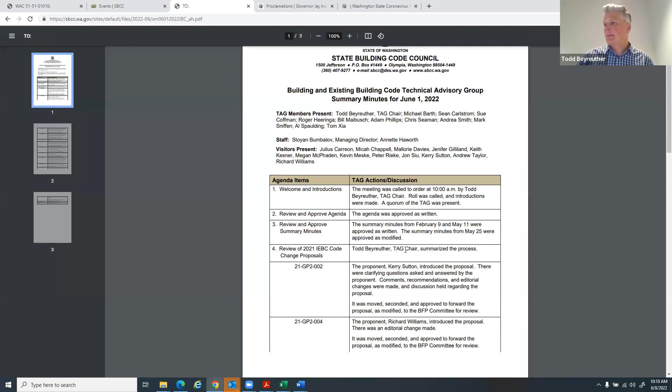Are you interested in flashing those? Annette, are you showing the minutes? I don't see them yet. Give me a second then. Well, if they're posted, I guess we can give a second for everyone to make sure they've reviewed them. Sorry, that took me a minute. Can you see now? No, thank you, Annette. Well, I'm not sure who is showing the minutes, but it doesn't matter. It's summary minutes.

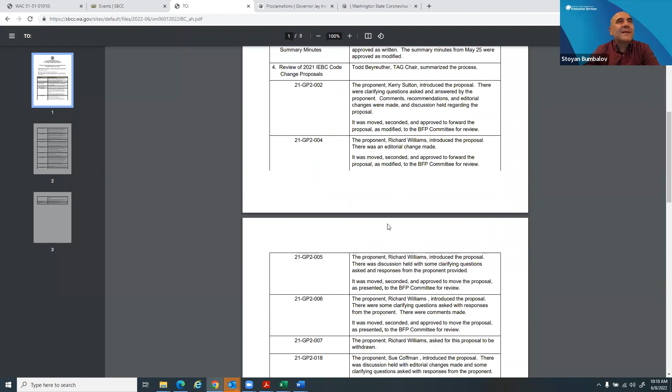Okay, as we're reviewing them independently, are there any proposed edits or changes? Let me know if I'm rushing anyone. If not, we'll hear a motion to approve. I'll move to approve the meeting minutes for June 1st. Thank you, Sue. Second. Thank you. Who was that? Sorry, I missed that. It was Andrew. Oh, Andrew, thank you. Okay, any discussion?

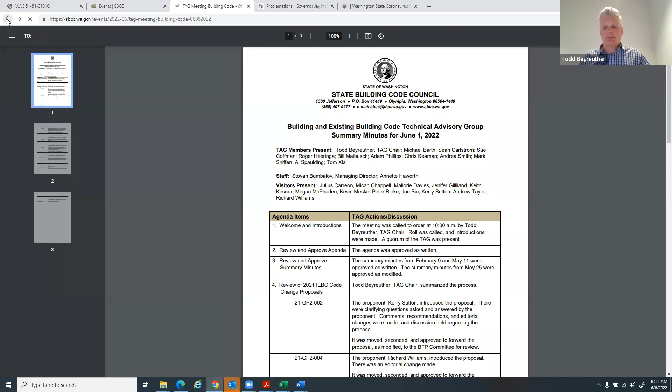All those in favor signify by saying aye. Aye. Any opposed, nay? Or abstentions? Okay, June 1st minutes are approved. Okay, now we're into the main item here, agenda item 4. I'm going to give a little bit of summary here as we work our way into these today.

So we are at the end of our initial phase as a technical advisory group, where we've reviewed proposals for the 2021 amendments to the Washington State Building Code for both the IBC and the IEBC. There are 3 proposals that we've tabled for this meeting. The IEBC was just the last proposal, and we chose to table it because it needed a little more attention, and at least one member wanted to take time to review. And then the 2 IBC proposals have been a more thorough discussion, and they've been a heavier lift. So we've left those 2 to this meeting.

I want to again restate for everyone that the Technical Advisory Group advises the State Building Code Council. The State Building Code Council are appointed members, often volunteers, appointed by the governor, with rulemaking authority granted by the legislature to conduct this process. The Technical Advisory Group, while we do take action, and although a couple of us are on the State Building Code Council, this is our recommendation on what the council should consider as it moves first into the standing committee, in this case the building, fire, plumbing, the BFP committee, and then ultimately the council. So there are 3 steps, and you see on the spreadsheet here, we're at the TAG recommendation.

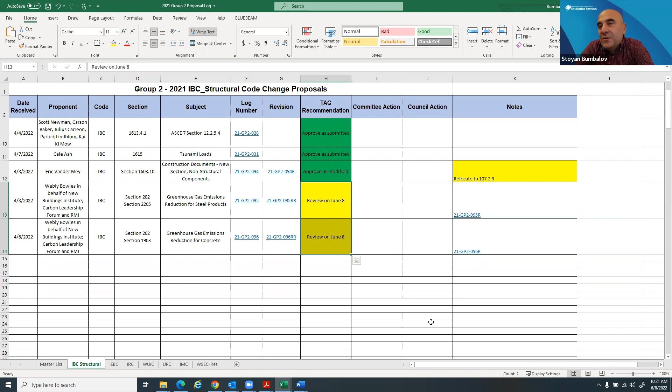And thank you, Stoyan. And Michael, to that point, in this position and responsibility as chair, I'm not taking a position on that. I've been advised to move forward and conduct the responsibilities of this role on these proposals. Roger, would you like to add to that, please? Yeah, I just want to respond. I believe that whether or not the original proposals 95 and 96 went against the RCW is an opinion, which I don't happen to share. However, this TAG is not the venue for us to get into conversation about interpreting the RCW.

The TAG is here to consider whether the proposal makes sense moving forward. That's number one. And number two, I would suggest, if people have not looked, the revised proposals in there have eliminated, in my opinion, any concerns that they would go against the RCW. So the second revision to these proposals, in my opinion, has taken out all of the controversial portions, and we need to debate that and talk about that as we get into those proposals later on.

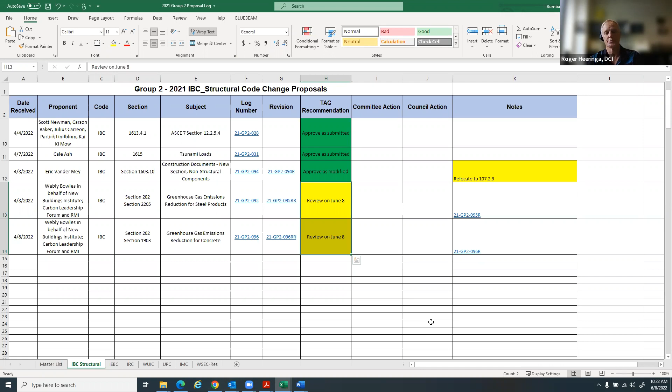Okay, thank you, Roger. Yeah.

Okay, so let's come back to these two proposals on the IBC, and we can have further discussions about scope and what our responsibilities are today as a TAG. As we discussed in the last meeting, I want to go through the final IEBC proposal first, and then we'll get to the IBC. So could we pull that up, please, and invite the proponent to speak to this proposal.

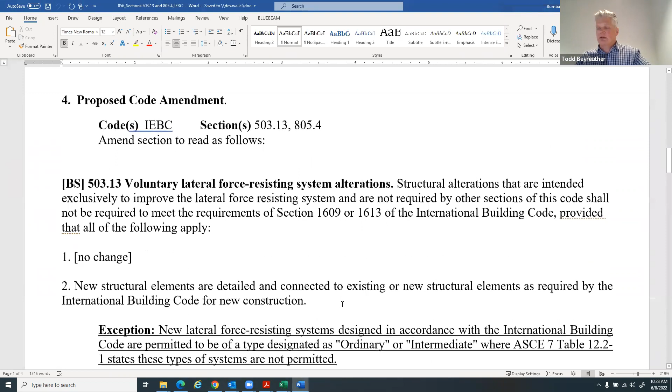Yeah, hi, this is Natalie Bohold, the proponent. Welcome. Thank you. Yeah, this is my first time joining this type of group, so thanks for letting me present this proposal.

So this proposal adds an exception to two sections in the IEBC: 503.13, which is a prescriptive method, and 805.4, which is the work area method. The purpose of this proposal is to add flexibility to the type of lateral systems that can be used for a voluntary seismic upgrade or alteration project. The reason this proposal was introduced is that the current language can be found to be ambiguous and doesn't clearly offer flexibility in the type of lateral systems that can be used for voluntary seismic upgrades.

Currently, the main text of these sections states that the seismic and wind sections of the IBC do not need to be met as long as 4 items are met, which are not currently listed here, but they're listed in the code. Of those 4 items, the second one states that where new structural elements are added, these shall be detailed and connected as required per the IBC for new construction.

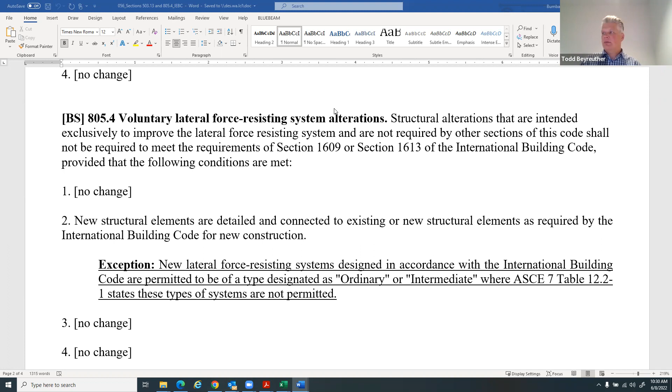Are there any questions from anybody else? Okay, I'm not seeing any, but having cut my teeth on URM retrofits during the Nisqually era, I also am in strong support of this. Thank you for bringing this forward. And this is specifically for IBC designs. Somebody using ASCE 41 obviously has more flexibility in the design. So, yeah. Okay.

Well, seeing no other questions or comments, would someone like to make a motion to move this forward to the BFP committee? Yeah, I would make a motion that we approve this as submitted. Thank you, Roger. This is Sue. I'll second. Thank you, Sue. Any other deliberation? Okay. All those in favor signify by saying aye. Aye. Aye. Aye. Any opposed, nay? Or abstentions? Okay. So approved. Thank you, Natalie.

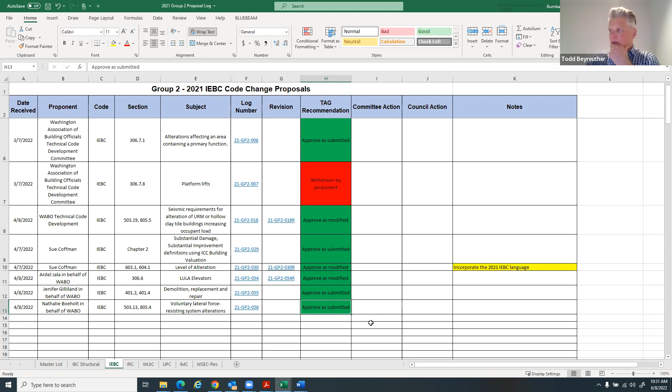Thank you. Okay, now that should conclude all of our IEBC proposals. Now we'll move into the two IBC that we previously discussed. And I see, as it was posted, that there is an amendment. So I think I'll first ask the proponent to give us a summary, please.

All right. Good morning. My name is Webly Bowles. I'm with New Buildings Institute. Thank you to the TAG for your time in considering these proposals. It's been a heavy lift for you, I hear that, but I appreciate your time and attention and the AG's time in reviewing these proposals.

So there's 3 proposals here. The TAG can choose to accept the third proposal or not. The code change proposals 95 and 96 have been combined into one proposal of 95 with the addition of engineered wood. And that's a little bit of a backdoor, and the TAG can choose if they want to do that or not. We did that because of the overwhelming interest in including engineered wood into the proposal.

If I can clarify first, yes, it was submitted. I posted it on the website. However, I consider this a proposal that was submitted after the closing date on April 8. The TAG can discuss this and recommend the council accept this proposal, and I'll make the same comment at the council. And if the council decides to do it, it's out of my hands.

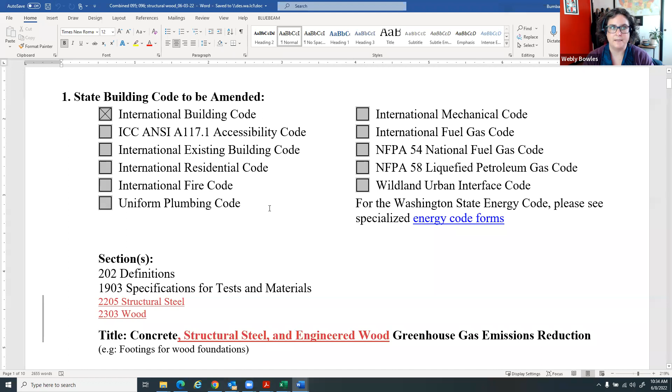So here is the combined document. Again, I will use this for discussion purposes, but whatever the TAG recommendation is, I will update 95 and 96. Okay. On the website, you have the last versions of 95 and 96, and again, I posted the combined document. All right. I see another hand up. Should I move forward with doing the quick summary? Yeah, the floor is yours, brother.

Thank you. Okay. So in the concrete portion first, it requires that 75% of the ready mix concrete mixes provide product specific Type 3 EPDs, environmental product declarations, and that they are available in a public database. 2 definitions have been removed, cementitious material and lightweight concrete, and that just means that the ACI's definitions apply over these revised code definitions.

We've also separated out in the definitions CO2 and GWP, though I'm not sure if we actually need to include GWP because it's not mentioned within the proposal. We've also clarified that the proposal is for the primary structural frame, including lateral and foundations.

I'm not sure that we actually need to state lateral, but because it's not clear that that definition is within the primary structural frame. So that excludes parking lot, sidewalks, and other concrete from this proposal. Just clarifies that a little bit more. And then we have the same exceptions for precast, shotcrete, and auger cast. And that just helps to clarify that we're really looking at ready mix concrete here.

It only applies to projects that are over 50,000 square feet and that use more than 50 total cubic yards. So projects where no concrete providers have EPDs within 100 miles are also excluded from this. And then we have confirmation of the product's EPDs should be provided to the AHJ prior to certificate of occupancy, either through a signed letter by the architect engineer. And I'm happy to talk more about implementation and enforcement later. Just want to get through these changes first.

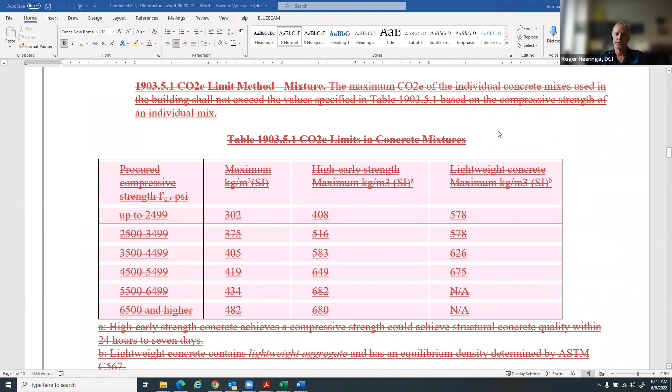I know that there were concerns about smaller concrete producers or smaller suppliers, and I think, number one, limiting this to primary structure takes out all of the sidewalks, curbs, all of that kind of stuff. So it does just address the primary structure. I think the 50,000 square foot limit means it is only for larger projects. While this could mean that there are projects that a small supplier goes after where they do have to have EPDs, it's not like they're going to have EPDs for every mix that they have under this proposal.

There was a concern about ramping up of needing to have these EPDs, and I want to be clear, theoretically, if it goes all the way through, it would become effective July of '23. These EPDs would not need to be submitted and completed until right before C of O of a project that is approved under the new code. So I would say 6 to 12 months of a design and permitting process and another 12 months of construction, you are probably in the January of 2025 range when you would actually have to have these EPDs available. So I don't think that this is springing some huge issue on the industry.

And then, as I said, there were comments about why we're doing steel and concrete, not wood. Ultimately, in my opinion, concrete and steel are the products that are responsible for the largest percentage of greenhouse gas emissions. So I would support 95 and 96 under their currently modified form. I would also support the combined version that includes wood as well, assuming that works from a process perspective. So that's all I've got.

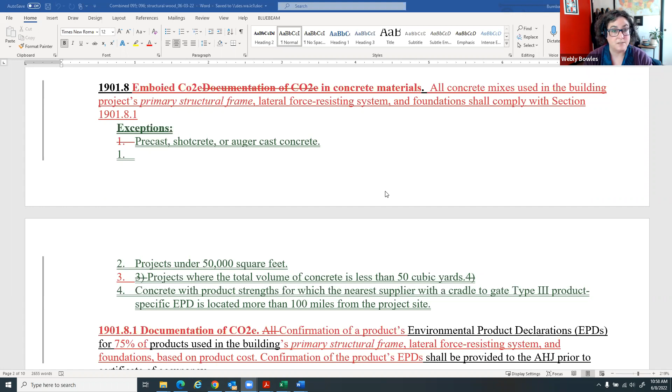You mentioned concrete product in one section. The product should be defined wherever it's first mentioned. If we need to clarify that, I think we can. The exception for steel based on cost is, I understand the concern here.

I think that this, we tried to come up with a similar aspect for that 50 cubic yards of concrete, so that it's somewhere in the same realm of, if you're not using very much of this product, it doesn't need to comply.

I think from a plans reviewer standpoint, you generally understand how much steel is in a project based on the total project cost that is associated on the plan at plan check. When you get into construction, obviously all the cost change things happen, but I think that you need to go back to that stage if we're talking about kind of how to implement this. I think we can only really do the plan that's set up at permit. So that's where I would say that the design team's generally going to know if the steel is about 5% of the total project value.

And then in terms of the code reviewer tracking this, I think it was said before that it's really a design phase aspect that needs to be tracked and verified, and the confirmation comes from the design team, either from a letter. So I think we had changed the language a little bit to say confirmation of the product's EPDs shall be provided to the AHJ prior to certificate of occupancy. And that confirmation doesn't mean it has to be the product's EPDs. We could have a letter that's signed by the architect or an engineer. It could be a letter in a table of products, a top sheet, however you want to see it.

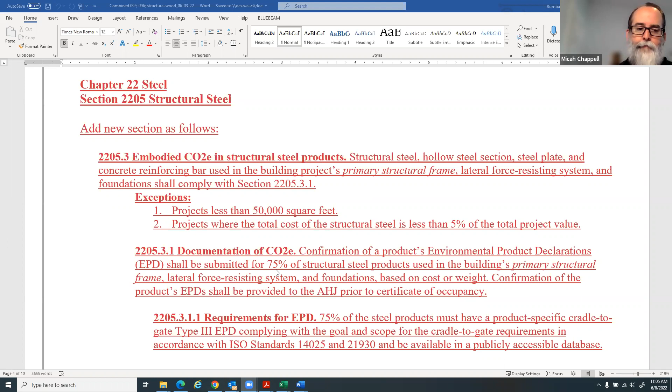Thank you, Micah and Webly. Okay, Rachel, please. Good morning.

I am Rachel Jamison, Vice President of Markets and Sustainability with the American Wood Council. We represent 86% by volume of wood products made in the United States. I'm grateful for the opportunity to speak with you today. I want to strongly oppose this proposal brought forward to you by the Carbon Leadership Forum and the New Buildings Institute. We first want to recognize that there is indeed an urgent need to act on climate change.

The American Wood Council has been acting with urgency on data collection and other initiatives. Decarbonizing the built environment is necessarily going to be a part of how we address the challenge of climate change. Some questions have been raised about the new section on wood in this combined version and how industry was engaged in this addition. I can put it simply, we were not. In fact, the language comes from a House bill that didn't make it out of committee 2 years in a row, and wherein we have been working in what we thought was good faith with the proponents on language that was workable.

As has been articulated by several other speakers, the building code is not the right place to regulate carbon. This language in front of you has been tried and has not moved forward. It's been put in front of the Washington State Legislature 2 years in a row, and both years it's not made it out of committee. State senators, after last session, have articulated an intent to work with industry and NGOs in the interim on a policy that is collaborative, science and data-based, and that represents the best thinking of all impacted parties. The American Wood Council has been eagerly awaiting this opportunity. For the language to emerge in this context is not in good faith regarding processes that have already been discussed.

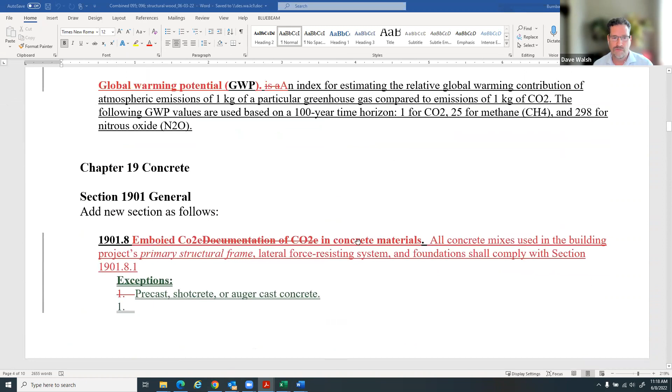First, does the definition of primary structural frame include the floor assembly and not just the foundation, columns, and beams which hold up that floor assembly? For example, does it include post-tension concrete floor slabs, a CLT floor panel, or a composite concrete steel deck and topping slab? If so, this needs to be clarified, and steel decking should be added as one of the covered materials. I did have a question about the timing between when this code language is potentially approved and the first date this will be enforced.

I think Roger commented that the first time that things would need to be submitted was approximately January 2025. I'll note that even though that may be the time that it would be submitted, the general contractor would have to have confidence at the time of bidding that the EPDs are available and ready to submit. So actually the window of action, I think, for a contractor is having those EPDs at bid time. While some manufacturers are ready to go today, others will need a year's worth of data collection to even begin to have EPDs. We need to give an ample runway for smaller manufacturers to get up to speed, which will result in more options and cost competitiveness at bid time.

And then finally, while I understand the idea of providing EPDs at the time of certificate of occupancy, I do wonder how unforeseen situations will be handled. Micah kind of touched on this, and I think Webley touched on it as well. But for example, if there's an unforeseen supply chain or labor disruption, and alternate products must be used, and for some reason a 75% threshold was not met, would the C of O, certificate of occupancy, be held up indefinitely? And what would the remedy be?

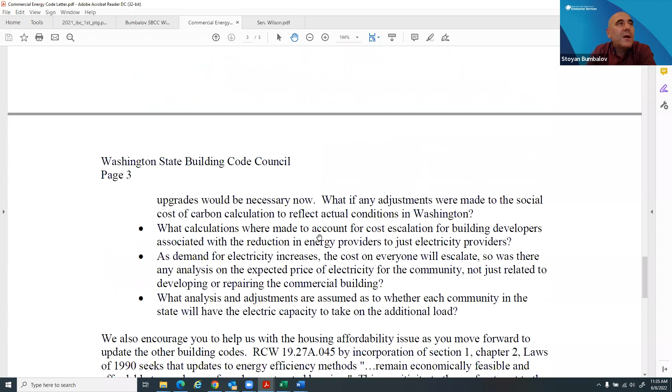I'm here. Okay, so here is what I received. I have one letter that was received on May 3rd. And here are the representatives that signed the letter. And this letter doesn't have anything related to the steel and concrete proposal. Correct. I received one from you and Representative Hoff. I'm sorry, I'm on the wrong one. So here is what is related to this proposal. Actually, it's 96, and here is my response. I think I addressed this very briefly at the council meeting in May.

So I didn't post these particular letters for these particular proposals and this TAG meeting because my understanding was that you wanted to raise the concern, and the concern was raised. And again, all comments that hit similar points, everything was posted on the website. So if there is a letter that I missed, I apologize, but this is all I have. Those are the letters I'm referring to, but I didn't see that that was actually the questions that we were asking, whether or not there was authority to do this.

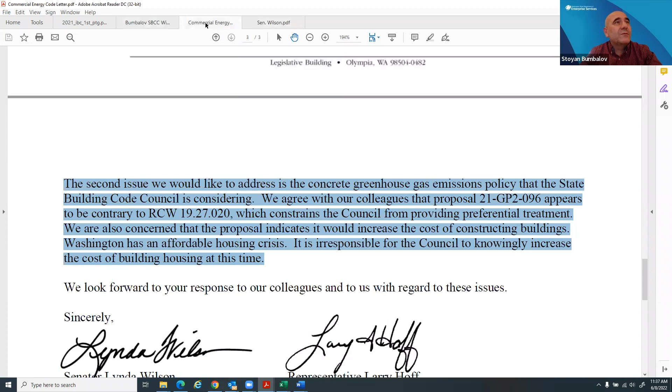Well, the authority in RCW 19.27.020, I think it was discussed several times, and it was your main point in this letter. And again, I apologize, I didn't mention that you asked the same question, but I saw you were attending the meeting, so I was expecting you would be talking about it, and you did actually. But okay, and you sent that back to the other two senators? Yes, I sent some information to them as well. Okay, thank you. The other two, I'm not sure they're senators though. The others are representatives. Representatives, yes.

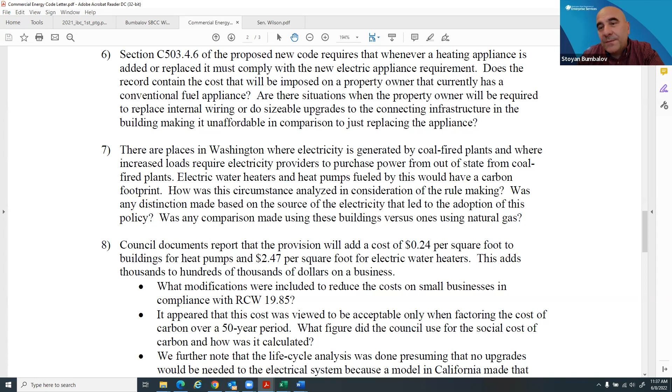So they didn't ask me about proposals 95 and 96. They had questions related to the adoption of the commercial energy code. Correct. And I sent them a short response, and all of the questions will be answered in our final submittal in the rulemaking document. So it's still coming. Okay, thanks.

Okay, thank you, Stoyan. Bruce, are we okay? Yes, sir. Thank you. I appreciate your efforts, and I appreciate the clarifications on the process. But as many have commented on, there seems to be a lot of confusion or concern on the process on how we get from one place to the other.

Even though the TAG is technical and advisory, it seems to be a point in the process where they could make their recommendation, as you've tabled things in the past, to make do not consider going forward to any of the other subcommittees. It seems that would be a process that you might have available to you.

When the TAG makes a recommendation, any recommendation, it goes to the BFP, in this case, to the BFP committee. The BFP committee can accept the recommendation and refer it to the council, or the BFP committee can end up with a different recommendation, not agreeing with the technical advisory group. And then it goes to the council, and the council will do the same.

The council will review the TAG recommendation, the council will review the BFP committee recommendation, and the council will make the decision. The decision could be, okay, we will include these proposals in the initial submittal with the CR 102, and then we'll post the proposals for comment period and testimony. In this case, the council will receive more information, how good these proposals are or how bad these proposals are. This is the standard procedure.

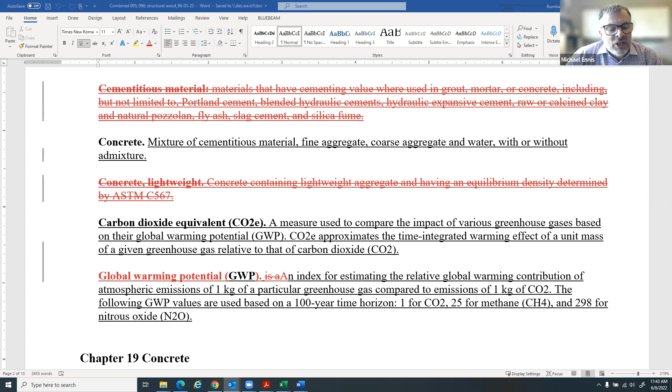The one area that I want to focus my comments here, and it's referenced in the letter also, is the lack of analysis on the cost impact. It seems a little weird to me that proponents can claim there is no cost impact in their application, and then it appears the TAG just simply washes their hands of any analysis on whether there's a cost impact to these proposals.

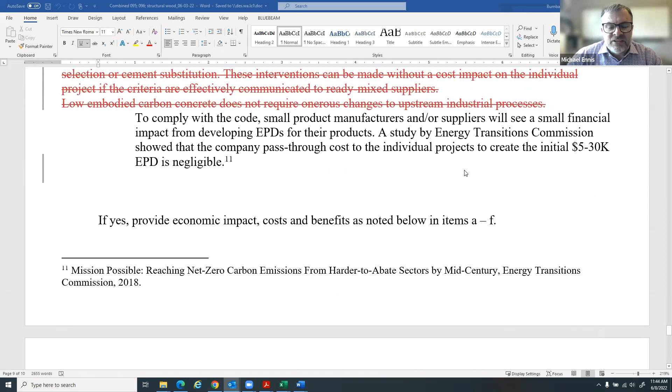There's no small business impact statement that's been completed, and it appears that you're going to move something forward without fully understanding what the cost impacts are going to be from these proposals. That's very weird, bizarre to me that you would do that. It would seem to me that you would have an obligation to understand what these impacts are going to be before moving anything forward. And I don't think that analysis has been done. So I'd just like to note our objections to these proposals and ask you not to move them forward.

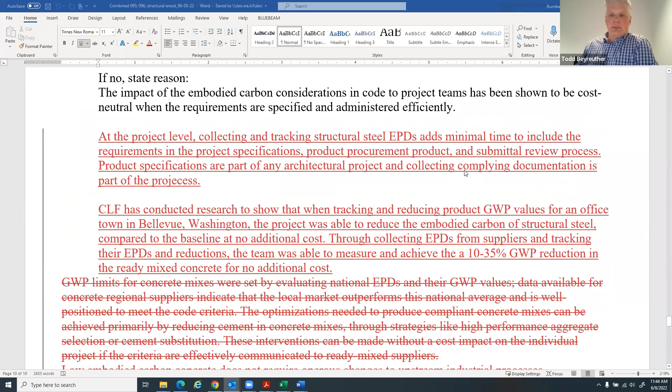Thank you. Okay, thank you, Mike. Tim, please. Yeah, this is Tim with AGC. I just want to say kudos to Rachel, Bruce, Mike, and Senator Wilson. All your comments were very articulate. The question I have for the proponent is, Webley, what's your response to what you've been hearing for the last half hour?

Okay, Webley? You want to respond? You're on mute, or at least we can't hear you. You're not on mute. Yeah, I see you're unmuted, but you're not. Kind of. Okay, well, we'll come back. Tim, anything else, and we'll come back when we can.

No, I just want her to respond. I mean, Rachel especially was very articulate at just talking about why this is the wrong place, what the legislature's done, what the process has been so far. Why is she coming to the State Building Code Council? Can you hear me at all? Yep. Hi, good, Webley. Okay, great.

It is a really wide question, so it sounds like, why are you coming to the Building Code Council is the question I'm going to address here. It's because we work within the building codes, so that's where our focus has been. There's focus that's happening at the policy level, and I think that we need both. We need to work at the policy level as well as the code level. As you know, the building code is the very worst building that you can build, and so we think that needs to be addressed so that we can improve it for everybody. And within embodied carbon, we have an opportunity to address that within the materials. So that's the general reason why we're working in this realm.

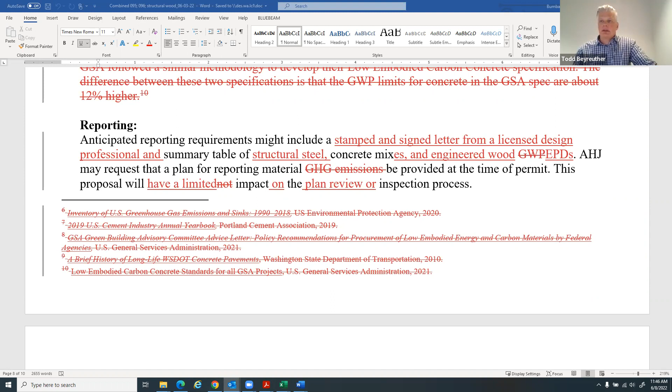Okay, thank you, Webley. Okay, thank you, Tim. Anything else? No, thank you. Okay, appreciate it. John, please.

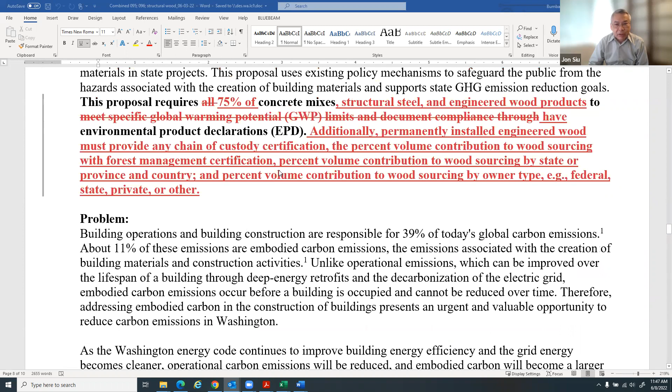Yeah, good morning. Sorry, I just wanted to address one technical issue. Was the question about the primary structural frame. And ordinarily, floor systems that span between beams would not be considered primary structural frame. So the question got raised about CLT panels, floor panels. Depends on your system, but generally those are supported on something else. And so the CLT panels would not be primary structural frame. Same thing for, as someone pointed out, a steel deck.

Say take a steel deck with metal trusses supporting them. They span between beams or girders or whatever you want to call them. Those ordinarily, again, would not be considered primary structural frame. It's only if those pieces connect directly to columns. There's some real question about PT. Would we look at that as truly a connection directly to the column? And I think I have to give my standard answer. It kind of depends. I think for those who are asking that be clarified, if you intend to include floor slabs, then those need to be more clearly called out.

Great comments, John. Roger, I saw you put your hand up. Do you have a response to John or addition? Sorry. Yeah, and John, I agree that definition of primary, what's the right term? Primary structural frame. What I would like to see in the document, and I guess I will take advantage of the floor to suggest that my understanding of the TAG is, if we think that there should be additional edits to this, this is the right format. So if we think that we should reword some pieces of this, this is the venue for us to do that.

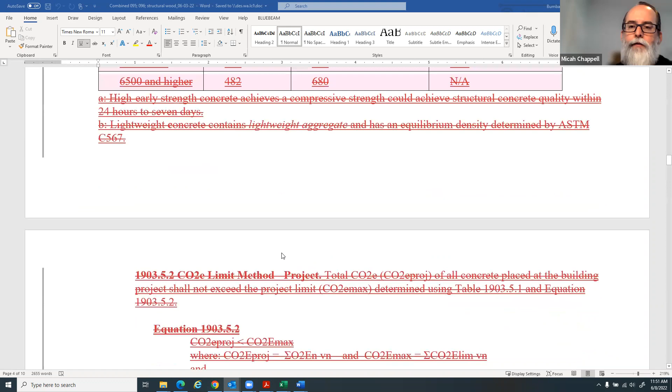I just wanted to mention the two definitions in question. Primary structural frame and secondary structural members are defined in the IBC. And I'm not sure if Roger's change there would clarify the difference in the two and how this would apply. I think that has to be vetted a whole lot more, would be my 2 cents. I'll leave it at that for now.

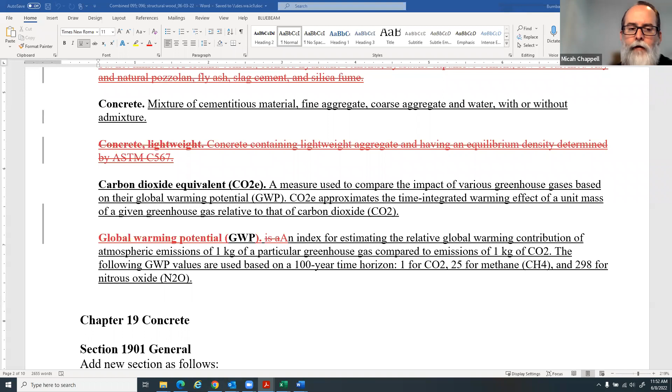Thanks. Well, that's why, Micah, I think John suggested also to not add a definition of primary structure. But I think if you get into adding laundry lists of stuff of what is or what is not, we try to frown on that in code development. Stoyan, if you could scroll down just a little bit to the section in question here, right there under primary structural frame.

I think once you get into trying to identify each system that will fall into this, then it becomes a problem of, well, if it's not on the list, it doesn't fall into that, and it does not leave room for interpretation by the code official or even the designer collaboration to determine what is or what is not included in this requirement. So again, I just want to steer away from the laundry list.

But you want the original definition as shown here. Yeah, if the intent is to include something of the secondary structural members, then we need to find a way to incorporate that term into this without trying to do a laundry list, would be my recommendation. But I don't have that language on the fly.

Micah, I don't disagree with avoiding a laundry list, but what I initially said was the primary structure, including all floors, columns, walls, and foundations. Is that, well, yes, it's a list. Are you concerned about the ability to interpret that? I don't think it's the interpretation question.

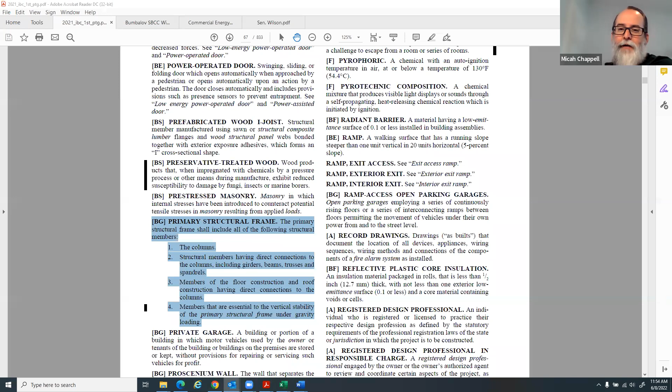Again, you're combining primary structural frame members and secondary structural frame members in what is required to meet this standard. At that point, I think your intention there would be to require all products that are concrete or steel or wood to meet this. But I think that's going way beyond the intent of the code change proposal. And I don't think that is the intent.

And in fact, the reason that the primary structure got included is it is not the suggestion that we are going to do all of it. For concrete, for instance, it's not all of the sidewalks, it's not concrete curbs. It is the primary structural elements that are supporting gravity loads and lateral loads.

If I could throw in here, Stoyan, can you please scroll down to the definition for secondary structural members, and maybe, Roger, this would address both yours and Micah's issues.

Right, that's what I was getting at. Sorry, thanks for having him scroll. And as you're doing that, Don, do you want to jump in on that also? Yeah, I'm just adding the one thing that you actually have it back up in your definition of primary structure. In order to maintain stability, you have to have a diaphragm, and your floor systems are your diaphragms. So you do not have a stable building without the floor systems to hold them together.

I will say that having been the author of that language, that was not the intent. But as a fallback, if you have to, maybe you have to use that. But I think secondary structure gets you there. This may be a different conversation that's worthy of the TAG taking up. This definition, John, as you were describing secondary structure, is contradictory to some other places where I've seen primary structure defined, and there may be a confusion issue in the industry on that topic.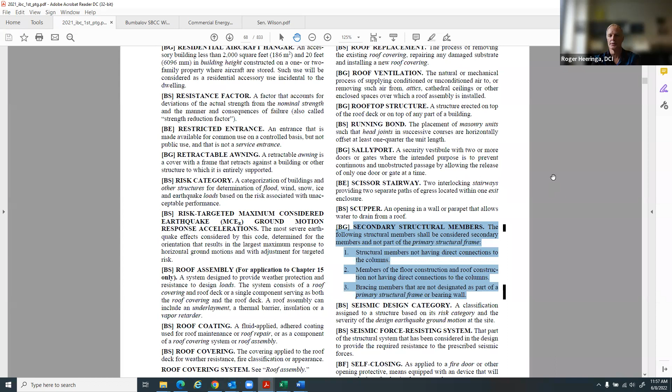I mean, from a code definition, this is all structural stuff. As I read the primary structural members and secondary structural members, I guess, Jon, maybe this is a difference in how these terms are used in the code. I think the primary and secondary, that's what we are talking about. I'm used to having secondary structural members be, the big one is structural steel that's used as a backup for cladding, at storefronts and that kind of stuff. And I don't see how that would be included in this. That's correct. My use of it has always been this way as shown in the code.

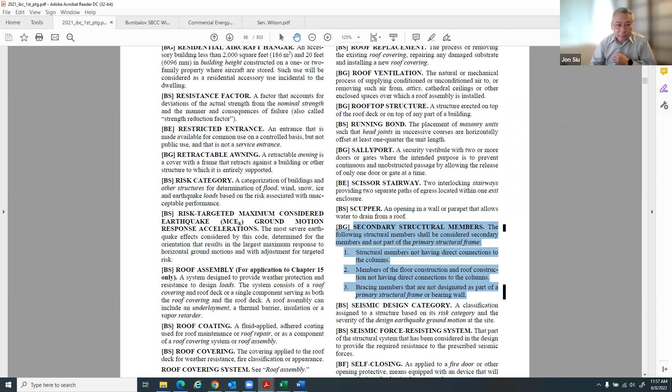Okay. So would you agree, Jon, that if we said primary and secondary structural members? If that's what's intended, yes, that would probably cover everything you want. I would agree with that. So we're here in the TAG committee where, from my experience, we are making edits to this proposal that we think may help this move forward, or may help resolve conflicts that people may have. So I would say primary structural frame, or primary and secondary structural frame, and then delete the lateral force resisting system and foundations.

Are foundations included in that, Jon, in your opinion? Or should we keep the foundations in here? I would consider foundation part of the primary structural frame, but it's technically iffy by definition, so keep it in there. Okay, so Stoyan, you're editing, you can get rid of the lateral force resisting system because that's covered under the bracing part of the secondary structural frame. Yeah, I think it's clear to call out foundations in a context of superstructure and substructure.

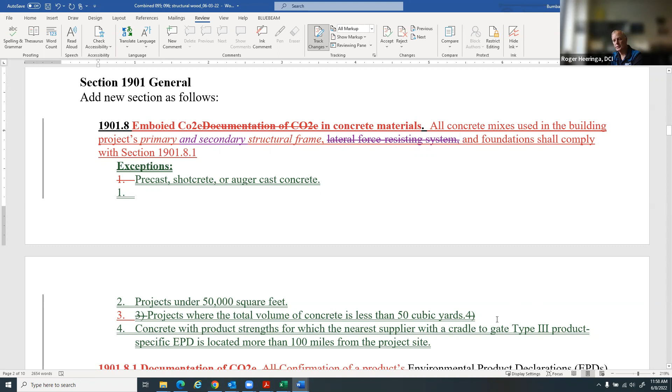And I think that change would need to be included in 095, 096, and if we were to move forward with the combined, it would need to be included in the combined as well. Roger, this is Micah. I'm not opposed to these. However, I do think you should keep primary structural frame and secondary structural members as separate terms; they are two separately defined terms. And if you want them to be per their definitions, then we should separate those. Just one of those little technical things.

That would be in the definitions. You would keep primary structural frame, secondary structural members, and foundations is how that should be worded. So a comma in between the two. Okay, all right, I appreciate that. That would be my recommendation if you're changing it. Yep. Thank you. Okay, good. Anyone else on this topic, primary, secondary? Rachel, did you raise your hand in the middle of this conversation?

I wanted to just make comments around language changes, given that it doesn't appear that there's an opportunity for contemplation that it does not move forward and that it stay in the legislative arena, where we hope to have a more robust stakeholder conversation. So given what I'm hearing on this call, I have other revisions that we've submitted through the legislative process two years in a row on the bills that didn't make it out of their various committees.

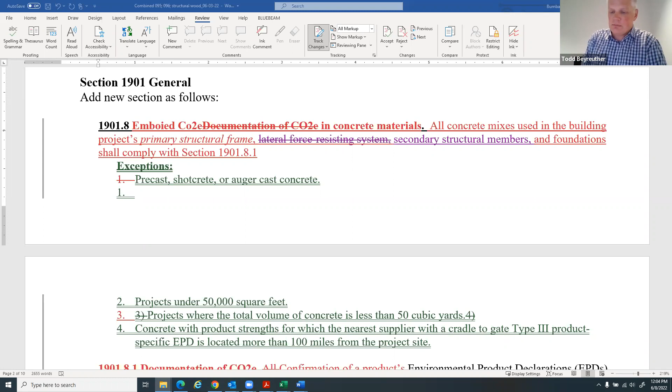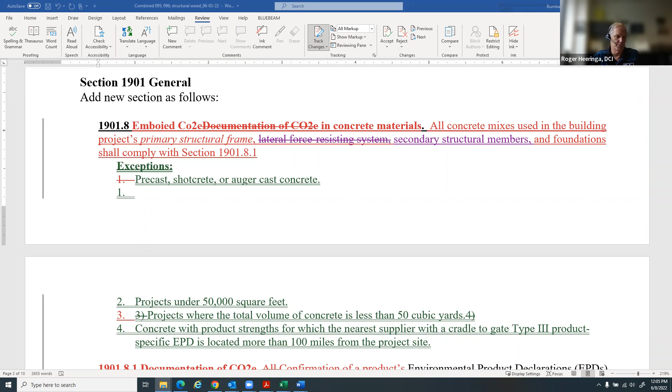Yeah, I was actually looking for the language in 101.4 that Jay suggested. So Todd, I had a suggested edit addressing the concerns about the building official and the enforcement of it. If we could go to the concrete section, 1901.8.1, right there, you're just there. Oh, there it is.

My proposed change, rather than the last sentence of 8.1, confirmation of the product's EPD shall be provided, I would actually suggest that we delete the confirmation of the products and replace that with a letter from the prime design professional confirming the products' EPDs shall be provided, which more clearly clarifies, in my opinion, that all that needs to get submitted to the city, to the building official, is a letter from the prime design professional that they have been submitted.

And as far as tracking whether it's 50,000 square feet or whether it's 50 cubic yards, if 48 cubic yards become 52 cubic yards, the prime design professional is going to confirm, and if it's less than 50 cubic yards, their letter may say these EPDs were not required because we had exception number 3. So it is putting the onus on the prime design professional that is writing a letter right prior to C of O that these have been provided.

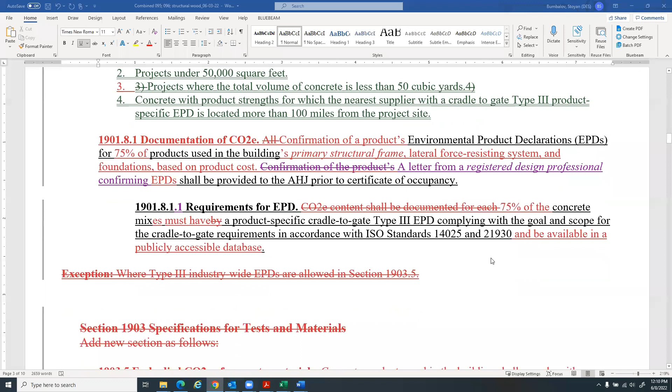Don, did you have something on that? Just on the comment, because it's on this page. I think the exceptions for the concrete and the reporting for the timber both are going to need some work to make them more appropriate for what we're after here. When I think about a ready mix concrete plant, they produce shotcrete and auger cast concrete as easily as ready mix. So I'm not sure why those would be an exception. Maybe that's something Webley could comment on.

I also think the 100 miles from the project site may have some difficulty in interpretation. Is that as the crow flies? Is that by road miles? How is the 100 miles measured? I could see people getting tripped up on that at some point. I understand the intent of item number 4. I don't know if there's a better way to state that. Okay.

If I can just respond to the precast, ready mix concrete only: that was just limiting the number of products that need to comply with this. If the TAG is interested in including precast, shotcrete, auger cast, and other concrete products, that's a decision to be made there. And I agree, Don, that the 100 miles from the project site could be clarified to say road miles, or traveled miles perhaps. It could also be based on time, but that's harder to determine. Road miles might be a good way, because then it's at least clear.

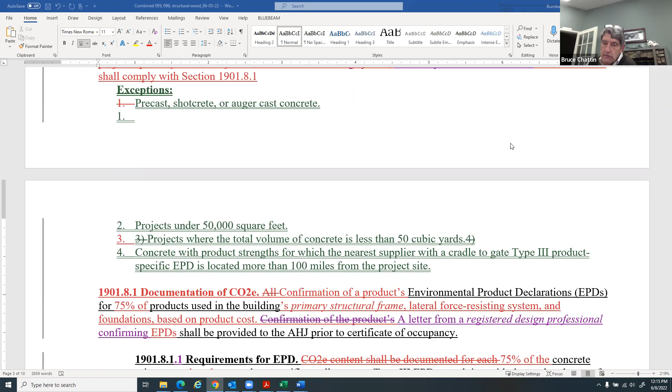Okay, I appreciate that. I'll check with some of our folks and see if that might be a recommendation, because some of our EPDs may go to cradle to grave. So there's no sense to penalize them, if you will, because others don't. I'm just interpreting there on the fly, but I appreciate A1 to A3. I'll check with some folks. Thank you, Bruce.

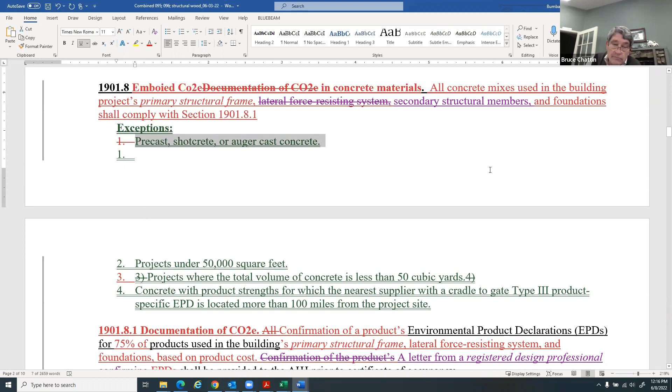Back to Roger's suggestion. Is anyone opposed to removing? I think I heard exceptions for precast and shotcrete. Is that correct? Or remove that whole line? My proposal would be to remove all of exception number 1. Okay. In the concrete. Are there any opposed to that in this exercise? Okay. Sorry, please strike those. Yeah, thank you.

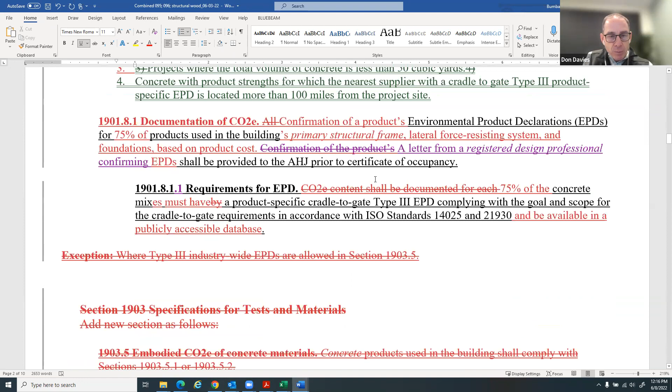Okay. Just the last comment I had is down on the wood section, the comments on what gets measured and reported. Let's go down. The items 1 through 4 there. I will defer actually to Micah on this one, but just how do those terms work in terms of what is being tracked and reported? Are we using the right words to describe this?

Can I chime in? I'm from the American Wood Council. I'm happy to speak. Hi, Don. That is actually one of the areas that we would like to see redacted, as it's outside of the scope of ISO 21930, as is the articulated intent of this section. And in order to create a level playing field among the materials, I don't know where some of these come from, but this doesn't really play into the issues at hand. So that was going to be one of my comments, with the lack of collaborative engagement with impacted industries on this.

I do have some editorial comments that I'd like to put forward. So should I just jump in now? Yes, but let's first address this. So thank you, Rachael. Speaking to that, is anyone opposed to then striking 1 through 4? Webley, obviously you should respond on this relative to ISO 21930.

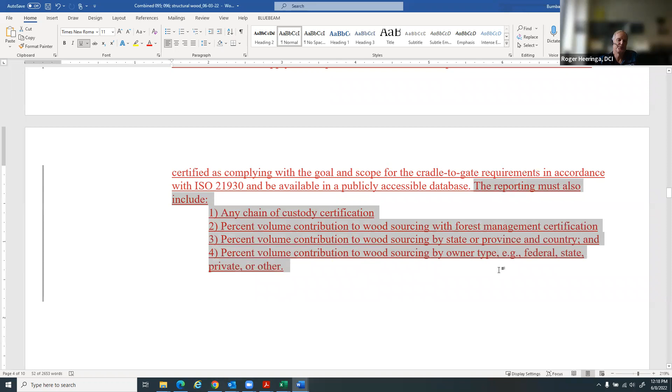Yeah, I'm fine removing it. It is different than the other requirements associated with Buy Clean, Buy Fair. And if we are to keep it, I think a word was removed here: if available, that information should be reported. But I agree with Rachael that because it isn't part of ISO and those definitions aren't defined, I'm fine taking it out. Thanks, Webley. So would you mind, from the word "the" reporting, strike all the way down the list? Yeah. Everything? Yeah. Thank you.

Okay, Rachael, go ahead. Yeah, so a couple of others. Right now, all of the materials except for engineered wood are defined. I would suggest adding a definition of engineered wood that includes glulam, CLT, and LVL. Those are the key materials that folks talk about when they talk about mass timber. Rachael, sorry to interrupt you on that, though. I'm asking, I should know, is that clearly defined in the definitions? I know it's defined in one of our RCWs.

Engineered wood is clearly defined in an RCW. Can you cite that RCW? Not off the top of my head, but yes, someone can, and it relates to our B&O tax. So if there could be an opportunity perhaps for another get together wherein we go over some of that, or provide a revision to the scope of that definition for the purposes of this exercise, that would be wonderful.

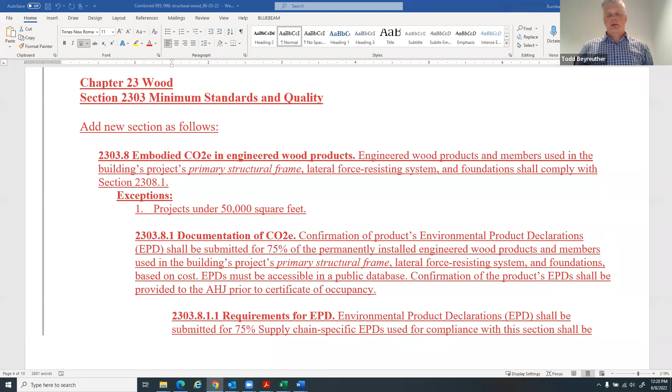Okay, is anyone opposed to that? Referencing the RCW definition of engineered wood product in the state of Washington? I'm not opposed. In fact, I support it. And I think, Rachael, the next steps, assuming, and I'm underlining assuming, that the TAG would move the combined proposal forward, there are several meetings moving forward where we can more clearly define those definitions.

Thank you. And not to beat a dead horse, but my hope is that this doesn't move forward and that we can take it into the legislative realm. But given that this is the chance to get some other language revisions, if we go to 2303.8 sub 1, I'd like to add sub 2 to make it consistent with steel projects, where the total cost of mass timber or engineered wood is less than 5% of the total project value. Just again, to ensure that we have some consistency in how materials are treated.

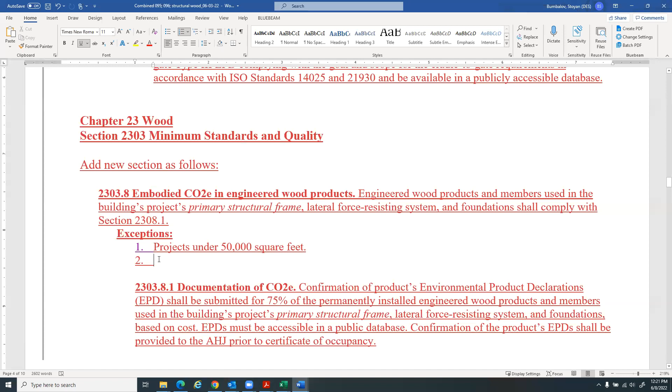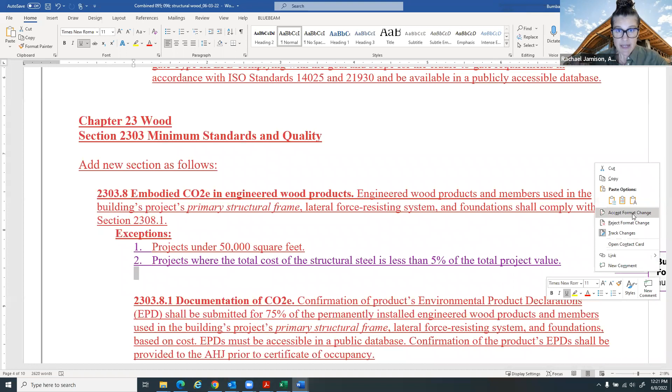You want to add exception 2? Please. And you said it should be the same right here? Yep. I mean, optimally, do you need to have different sections for different materials? We're just saying the same things over and over. To make this efficient, a definition section, and then an EPD section that includes all materials with the same exceptions and the same requirements could be a simpler way to get at the same thing. That would be a good idea for an appendix, I think. But currently the proposals are in different chapters, so we can't. Yeah.

So again, my hope remains that we can do this legislatively and keep carbon regulation out of codes. But if there is no option but that this move forward, let's make sure that there is a level playing field among all impacted material groups. So in the edit that you just made, you'd have to change structural steel to engineered wood. We are moving so fast between steel, concrete, and wood, my head started spinning. Does it look better? It reflects my suggestion, whether it's better or not. Okay. Anything else, Rachael? That was it. Thank you so much.

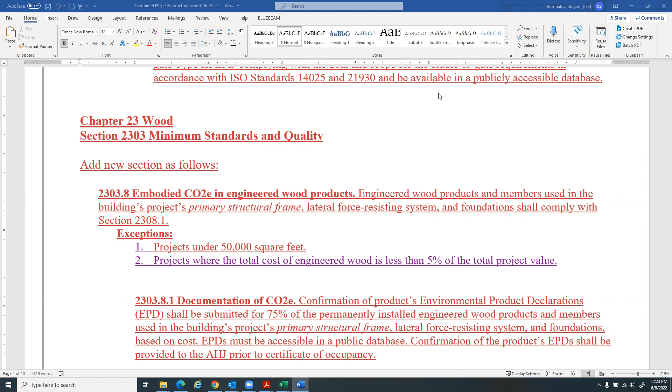Okay, I do want to move us towards the finish line here today. We have almost a half hour left. Larry, do you have a technical comment? Yeah, I think that after everything that's been said here today, we need to uncheck the no cost and check the cost, because now we've got a registered design professional that's got to go out there and check all this stuff. So we do have some cost here. It's not a no cost item, and I think that really needs to be brought up.

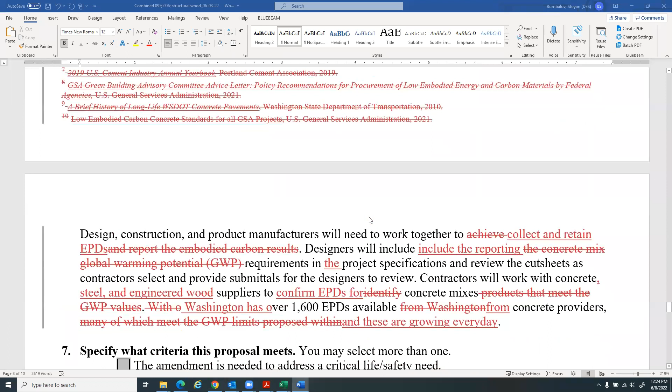The other thing that I see, as a person that actually has to go out there and make this happen, is the engineer specs all this stuff, but then when I go to buy the stuff, if it's not available, what are we going to do? We need to have some resolution on these EPDs for a specific company. With all the problems we have right now trying to get materials, we spec the stuff, then we go to get the stuff, and oh, by the way, we don't have this stuff. That's a huge issue right now.

And so we need to have some grace period in here, or some forgiveness. If the product's not available at the time, we need to have some forgiveness so we can substitute a product that's somewhere in the ballpark and continue with the project. This is a really bad thing right now, trying to meet specs, acquire the product, and then have it when you need it. Okay, thank you, Larry. Okay, Micah.

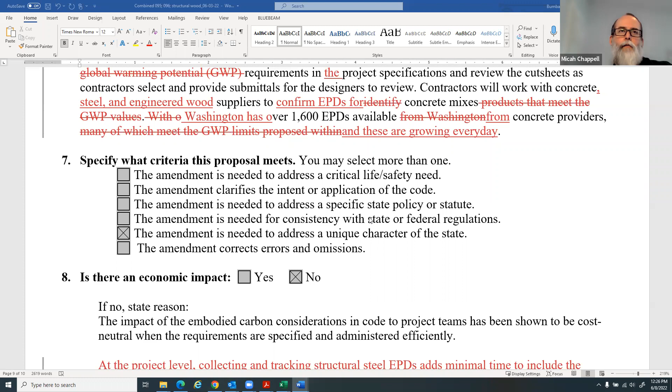Thanks, Todd. I just wanted to go back to the wood section if we could, Stoyan. I did want to bring up, and maybe we need to verify that in the steel section as well, and maybe that's an answer that could come from Roger. Was your intent to, wait till we get there.

Let's go to 2308. 2303.8 right there is fine. Roger, was our intent to modify the secondary structural member or add that to the charging language of 2303.8 as well as 2205.3? Yeah, yes, it was.

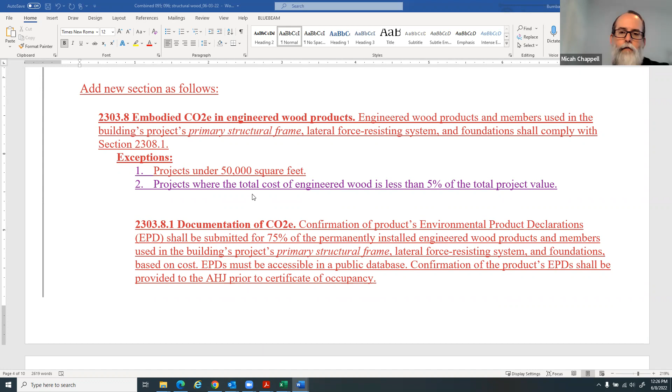I mean, when we made those edits, it was, and as we move forward, are we going to vote on 095 and 096 independent of the combined? My suggestion is we do all three, so that the committee has feedback on all three. Okay. And so, yes, it was the intent, Micah, and I was also going back through to make sure we pick up the changes in each one.

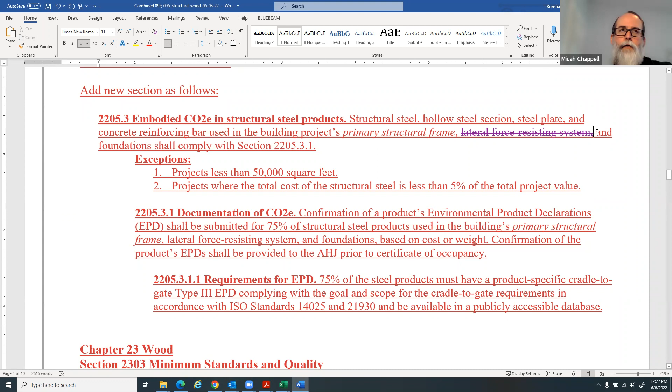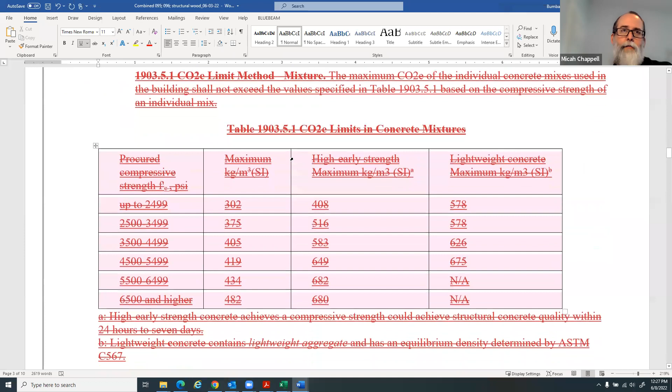Excellent. And then I did want to talk about the engineered wood. There's no technical definition for engineered wood as itself, but there are definitions for individual types like structural composite lumber, wood structural panels, prefabricated wood I-joist. The only thing that comes close to engineered wood is an engineered wood rim board. So I don't know if we want to consider those individual types of engineered wood, or if you're trying to incorporate all of them and then provide a definition. However, that may be a big collaboration issue on what should be included in the engineered wood definition.

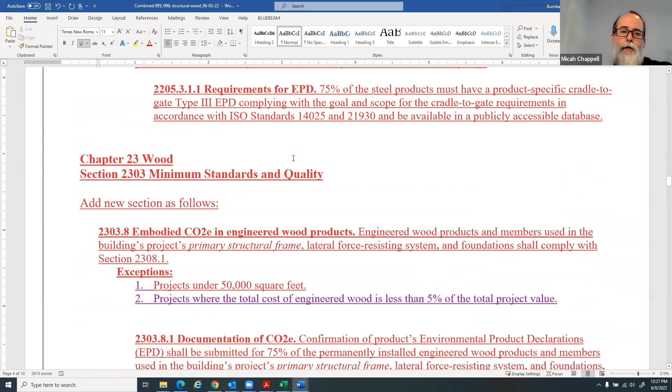So Micah, my recommendation was, and I've got the reference here, was to reference our RCW. A few years ago, the legislature passed a definition of, well, I guess this was mass timber, so maybe that's where I'm confused. Okay, thank you for that clarification. Because the mass timber products was the category that included cross laminated, nail laminated, glue laminated, laminated strand lumber, dowel laminated timber, laminated veneer lumber, structural composite, wood concrete composites. Yep, but it doesn't really classify all of that as engineered wood and provide a specific definition, in my opinion. Yeah, that's a good one, Becca.

Yeah, thanks. I speak to that on behalf of the wood product sector. For consistency in definition with mass timber, perhaps we take out engineered wood in the wood section and put mass timber. I guess that's a question of whether that's intended. Engineered wood, okay, and Todd, I did find the reference in the B&O tax section. It only talks about engineered wood products such as particle board, oriented strand board, medium density fiber board, and plywood.

So the reference I was thinking was RCW 19.27.570. Sorry, this one is 82.04.260. We have some statutory inconsistency that might be helpful to address. These are the kinds of conversations those collaborative processes would have helped with, to ensure that we have statutory consistency and help these conversations be a bit more robust. Yeah, and I would be careful. Oh, Todd, you were referring to the mass timber definition. That was my mistake.

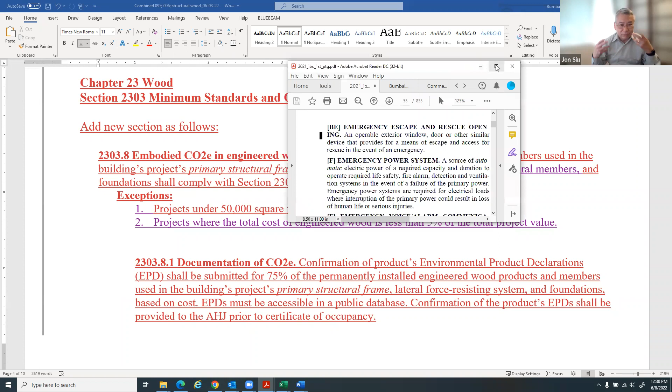I would be careful about trying to drag in definitions from the legislation that's already there. Engineered wood products, when you talk about it at the code development forums, people pretty much understand what you're talking about. So I don't know if a definition is really needed. You're talking about I-joist, glulam, everything that's kind of put together. So I'm not certain we really want to get into a definition for engineered wood products, because otherwise you may start getting into problems with the NDS and things like that. I don't know for sure, but how does it get used in other places?

In previous discussions, when we had attempted to engage in legislative processes on this exact language, we were working within our constituent group to refine the definition so that it wasn't left up to question. So this is actually something that we have contemplated fairly deeply, and had hoped that there would be that process where we could work together to get there. Rachel, we definitely hear that. I'm confident we will have that process and that opportunity at the committee level. So thank you for that. This is definitely something we flag and make sure that we find a good pathway.

But I agree with Jon. It's understood, but we need to clarify. It's like saying we're building with steel. We know what that means, and I'm not sure where that definition is either. Code uses the term structural composite lumber, which might be better than engineered wood.

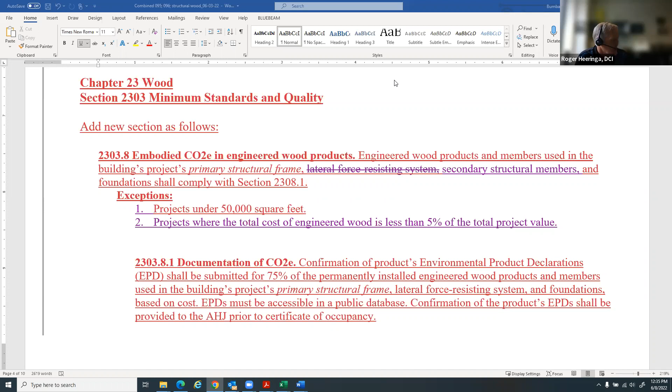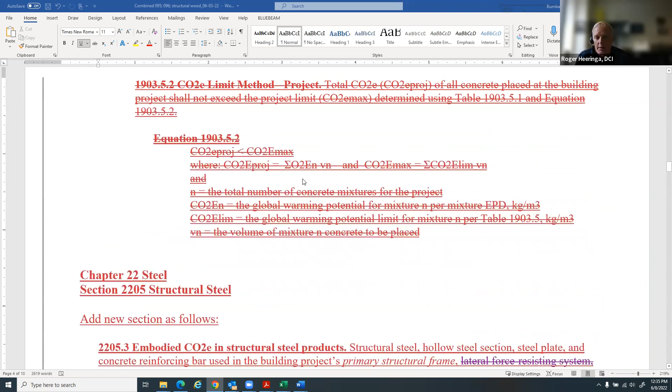But Roger, you just put your hand up. Give a response to that. Yeah, you're asking for a motion. Yeah, and let's set this up a little more. Let's break all three out if that's acceptable to everyone. My suggestion is to start with 95 and make a motion that we approve 95 to move forward, assuming that the combined 95 does not move forward. And I'm not sure the best way to.

Yeah, and I think we're saying the same thing, Roger, is that we're going to consider all three. And each one is going to be a motion to approve as modified, and you're voting yes or no on that. But we intend to do that same for all three proposals. Just to clarify, the combined document formally is not filed. So the combined document is here just for convenience for the TAC members, but we'll go with 95, 96, and the Wood proposal will need a different vote, whether the TAC needs to request the council to include this in the rulemaking.

I think we're saying the same thing. Is that correct, Roger, is that how you interpret it? That's what I'm, we move it forward to the BFP committee. The BFP committee will consider whether they do the combined 95, 96. If they do that, then they would not approve just 95 and 96 separately. If they say the combined is inappropriate, and I'm unclear on that, then we move forward on 95 and 96 independently. I agree.

95 and 96 were already submitted. They are filed as 95 and 96, and they belong to a different WAC. They have different WAC numbers, so I prefer to keep them as 95 and 96, and then based on the BFP and the council direction, we will figure out how to deal with the Wood proposal. The combined proposal contains 95 and 96. Again, I want to keep those as they were submitted with the numbering, and we may have a different number for the Wood proposal if it goes forward, or we'll figure that out later. So it's not important right now to concentrate on the numbers.

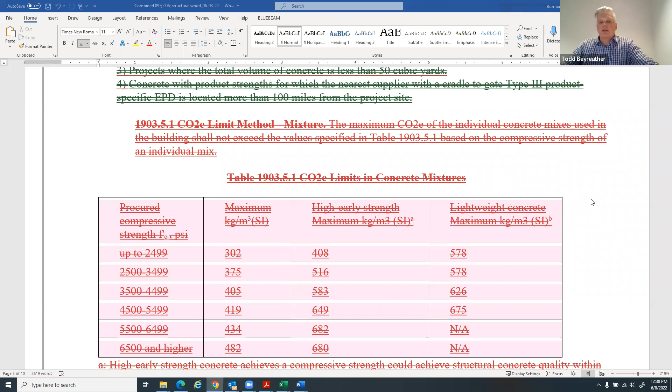I would just like Stoyan to bring 95 up, because I want to make sure that the edits that I have are there, because we did some in each, some in the combined. So 95 is the steel. I will copy paste the text from the combined to the 95. So right there on 1908.1, I found out there are two places in each one where the lateral force resisting system is, right at the top line of your page there.

1901.8.1, primary structural frame, EPDs for 75% of products in the buildings, primary structural frame. We should cross out lateral force resisting system. That has to be picked up, and I guess I'm unclear, Stoyan. You're saying you're going to go through. I don't want to work on two documents at the same time. So let's make the corrections on the combined document, and you can vote on each chapter. So I will incorporate the changes to 95 and 96. So that lateral force resisting system needs to be changed to secondary structural members.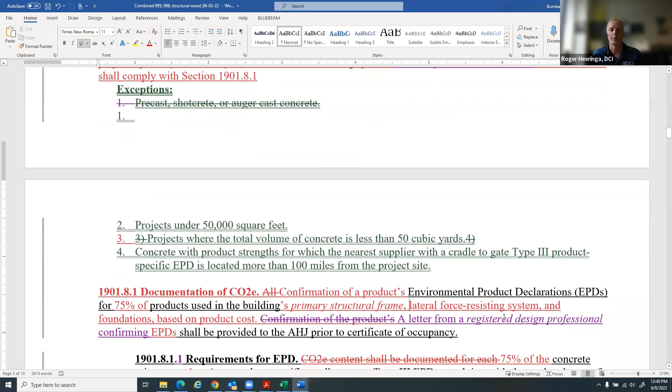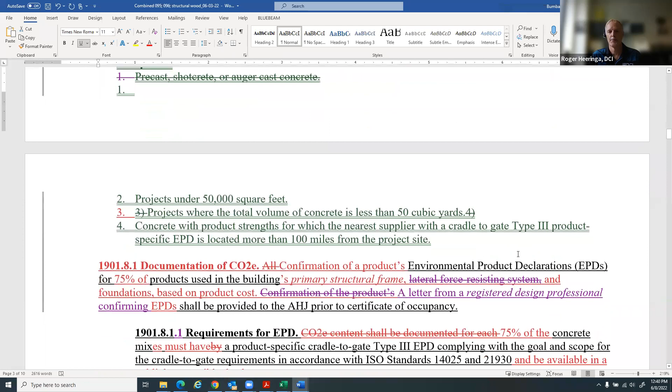So Roger, what I believe Stoyan is saying is he will do the exact same language as we worked on the combined. Right, but Stoyan, right now you have the combined version up there, is that right? Yes, sir. And so do we want to make sure all of the edits are in the combined version, Todd? Yes, I believe. Okay, so the one that you just crossed out, you should insert secondary structural elements. I want to get the combined one with all of the changes included. I wasn't understanding. Thank you.

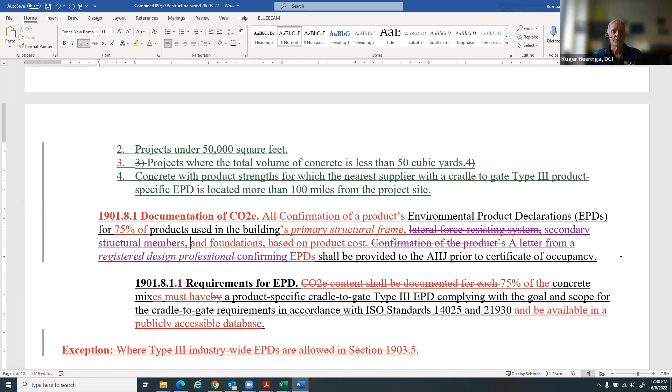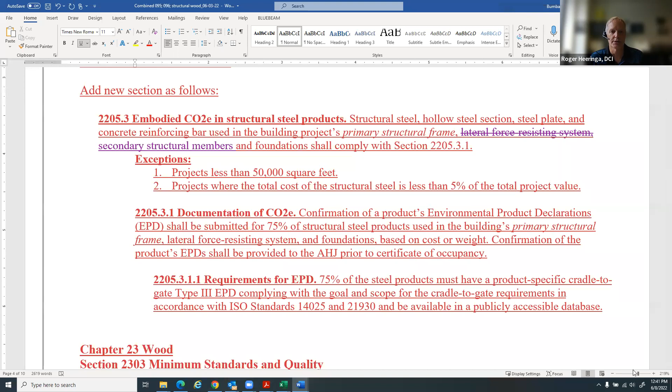Okay. And then did we get rid of number one? Go up a couple lines. Yes, we did. Okay, that's off. 1901, we got that. So now down to the steel section, there are two places that have secondary structural elements. We have that one, but right down in 3.1, there is another. That needs to be changed to also be secondary structural elements. And that should also be italicized since it's a definition. You're right. That's the final editorial that the staff will go through, but yes, you're right.

And then down in the wood. So we have secondary structural elements. You've got the first one. We added number 2 in there, right there. Okay. And then we did get rid of the 4 bullet points on the bottom, I believe. That was the only place it was, and I saw you do it.

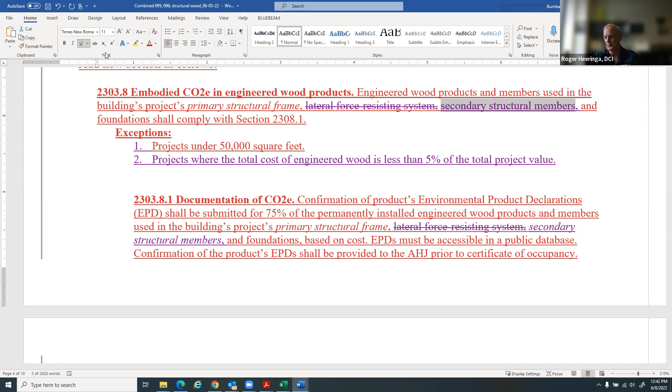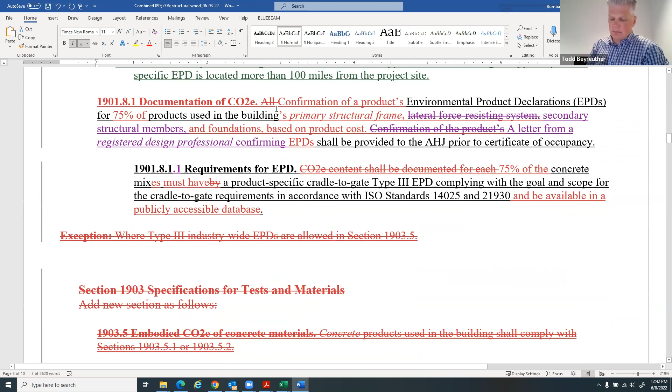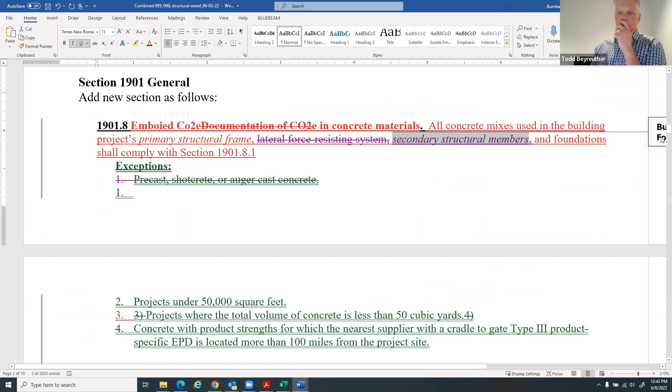So Todd, I would make a motion that we approve 095, the steel one, as modified with the changes that we have put into that combined proposal. Is that simple enough? It does. Thank you, Roger. Is there a second? So if we're choosing not to provide a second, we have to have a pathway if we're going to use the negative to disapprove as a recommendation. I prefer that we would take an up-down vote in the affirmative to be consistent with the other proposals, but it's the prerogative of the council if you don't want to provide a second.

Todd, for clarity, if I provide a second, can I vote no? Right, that's what I'm proposing, that we have a clear up-down vote, but we propose the motion in the affirmative. Okay, so seconding the motion does not equal the vote directly. Exactly. Or perception, that would be support, yes. Procedurally, you could kill it by not providing a second. And then we'd have to go take action.

I got it. It does give the perception of support. Okay, and that's a prerogative of each individual member. I'll leave it and try not to influence the process. I would second it so that we can get to a vote. Thank you, Chris. So it's been moved and seconded by Roger and Chris. Okay, now any final deliberation?

This is Mike Barth. I haven't commented just because I've been listening to everybody and listening to all the testimony and everything. And I didn't chime in because Micah pretty much said everything that I was thinking about it, and I support his view on all of that. But I also think with all this discussion, it's showing why this is not ready yet to move forward. There's so many stakeholders that also would like to wordsmith this and add bits and pieces that I don't think have been offered that full opportunity.

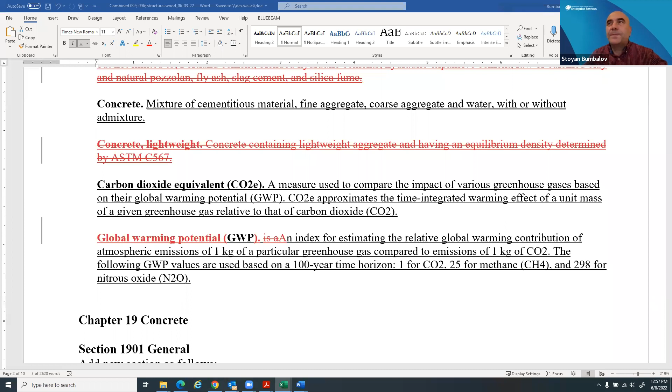So in an attempt to not make it confusing, we made it confusing, but I think we've all had enough practice now. So we'll entertain a motion on combined 095 and 096 with the wood additions for recommendation of disapproval to the BFP committee. This is me, Andrea again. I would like to recommend that we disapprove the combined 095, 096 proposal. Thank you. Is there a second? I'll second. This is Chris. Okay, thank you. So again, it's been moved and seconded for recommendation of disapproval for combined 095, 096 with the wood addition to the BFP committee. Any deliberation?

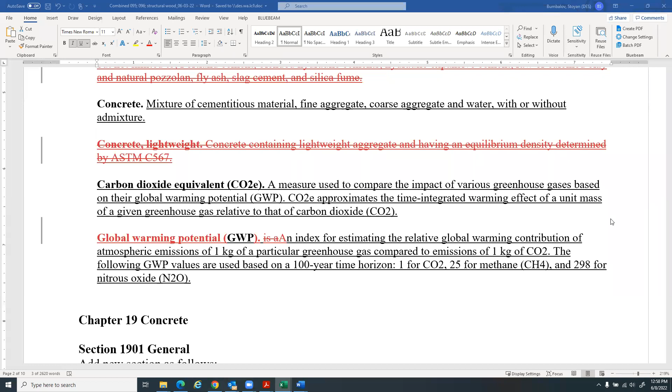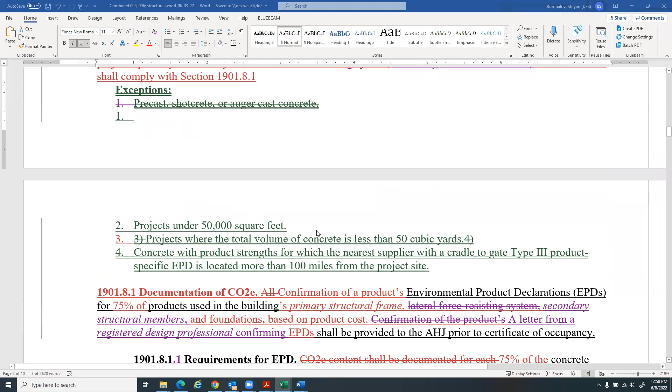Yeah, I have a clarifying question. Adam? Yep. Are we leaving engineered wood product or are we switching to mass timber product? I think the RCW 19.27.570 definition of mass timber product better aligns because that is what would be used in the structural system. I just want to be clear, is that what is being referred to, or are we leaving an unclear definition of what is meant by engineered wood product? I think it's fair to say we understand the intent, but maybe it's not spelled out. And your recommendation, Adam, is to reference the RCW. Yeah, I think I heard that thrown out there. Is that what's going to happen, that it's going to be moved over to that, or is that still up for discussion? I would recommend that it switch over to mass timber products based off the RCW definition because it lays out specifically what products are being talked about.

Okay. I want to be careful here, John, to include anyone outside of the council members' deliberation. I'm a little hesitant because a motion and second has been made on that. I think it's a valid question, Adam. We understood what the intent was, but did not make that reference to RCW for John's recommendation. So I guess I'd advise that we move forward with the current vote, knowing that there's opportunity at the committee level to clean up that definition and include more stakeholders, as was the request. Is that okay? Yep. Yeah, but a valid point, Adam. Thank you. That one I agree with. Okay, any other deliberation? Okay. Hearing none, let's move into roll call.

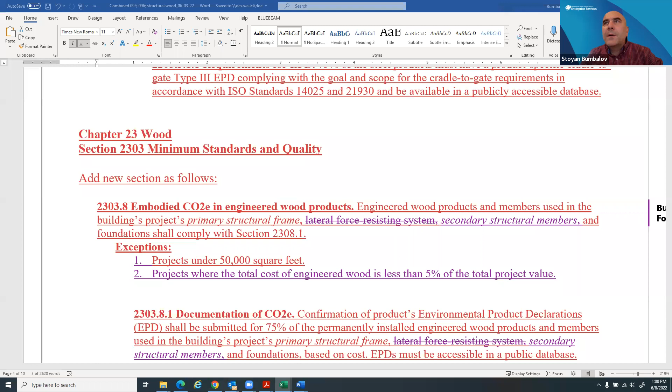Roger, No. Sean, Yes. Corey, Yes. Tom, Abstain. Chris, Yes. Michael Bart, Yes. Andrea, Yes. Bill, Yes. Adam Phillips, No. We have 6 yes, 2 no, and 1 abstain. Okay. Okay, thank you all.

Did not intend to go to 1 o'clock today, but I think we can safely say we gave all three proposals at the TAG level thorough consideration, appropriate for moving this to the next level at the committee level. So with that, thank you everyone, and we will adjourn.